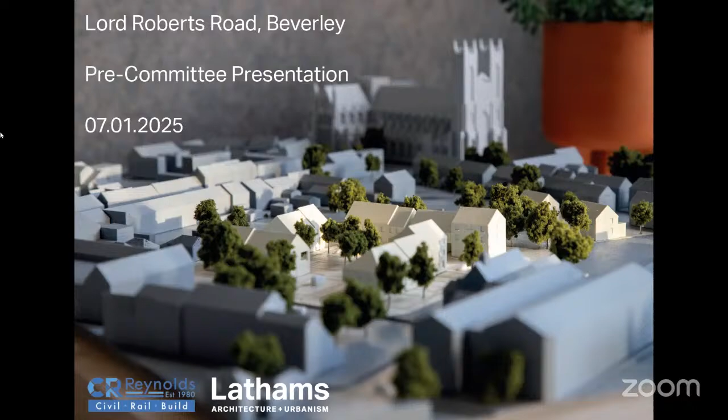Committee, afternoon. I'm Doug Jennings, the planning agent for the scheme, and with me is a local developer, Stephen Reynolds, who spoke to you at the committee meeting last month, and John Phipps, the architect, and Simon Chu alongside me from the Architectural Practice and Heritage Consultancy as well.

Now, at the committee meeting last time, you were concerned that you didn't have clear enough details before you, because of the small-scale black and white nature of the officer report. So we're pleased to show you this afternoon the scheme in an enhanced graphic display, and Simon's going to run through some slides later on.

It's a difficult site to develop with competing opportunities and constraints, and these sometimes pull in different directions, and you'll hear more about these from others. Key matters for consideration are obviously the context, views of the Minster, and the character of the conservation area.

Others are technical matters, such as the Highway Authority's requirement for 2 parking spaces per dwelling, and of course the modern building regulations. Some are council sales contract and local planning policy requirements, such as the need to retain the 50 parking spaces. And some are the need to provide for the operational requirements of the theatre and the rifle club. I can assure you that a great deal of thought and analysis has been given to all these matters, as you'll hear, and to all consultee comments, taking them into account and resulting in many iterations in the scheme.

It has been a very collaborative process with all the relevant officers of the council, as well as with Historic England and other statutory consultees. This is not an easy site to develop, and balances are inevitable. But I believe what you have before you is a very good scheme that is planning policy compliant, and that is why we have an officer recommendation for approval.

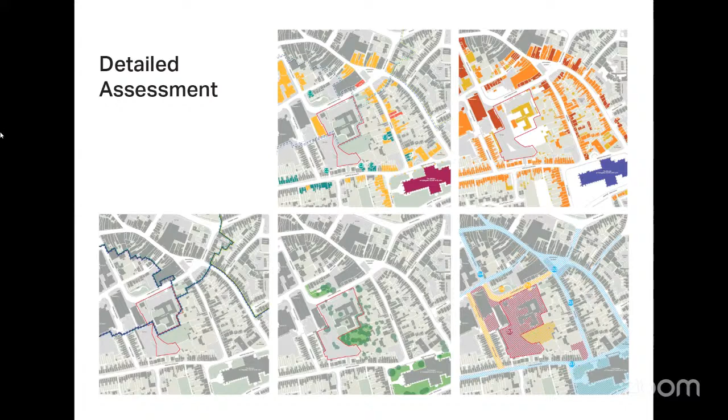In terms of the retention of number 8, there was considerable thought put into that. We looked at one of at least half a dozen schemes, and must have produced 30 different options to get to one which is deliverable and of limited impact.

Number 8 was considered for retention, but the current scheme, which sees its loss, is supported by Historic England. They can see the heritage benefits of the scheme, which outweigh, in their view as National Heritage Advisors, the heritage harm from the loss of number 8, which has no designation.

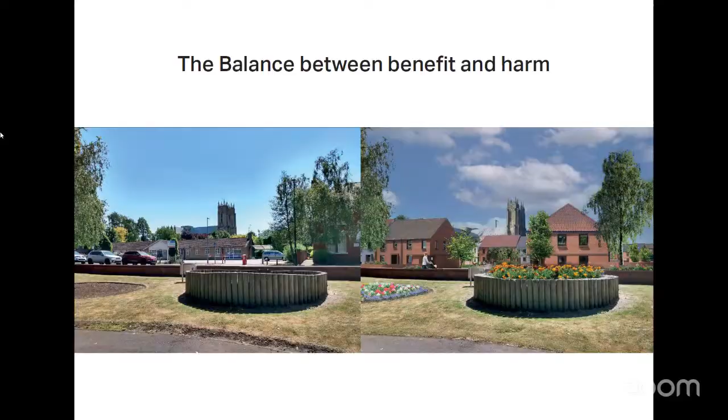What we attempted to do here was reconnect the site, which is essentially introspective and isolated at the moment, back in as an active and vibrant part of the town centre. What we're not trying to do with our proposals is mimic the neighbours. Understanding of character, which your own design guidance and design codes would suggest, will lead to something very much of its time, but informed by context rather than copying it.

Simon will talk about issues of sustainability, which have been raised by previous speakers, so I can probably leave it at that. But the overall summary, if I could quote Historic England, is that they would recommend the scheme be approved.

I'm just going to take you through, for the rest of the time - about 20 minutes, I think - a bit more detail of the scheme so that we can understand it better.

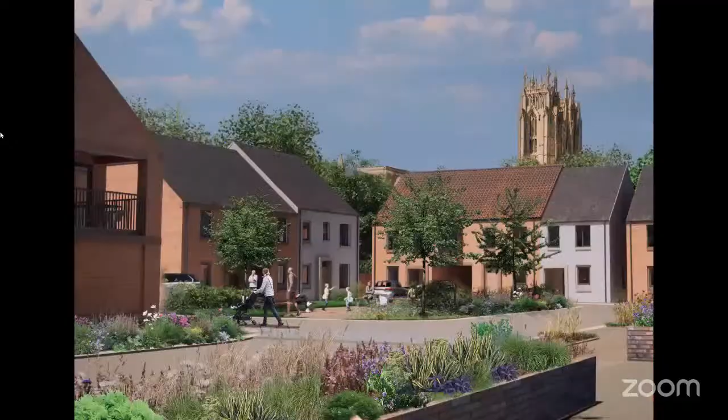What we've got here is a very complex site. I'm going to try and get through as much as I can, but we've got a very connected and constrained site in the middle of a very busy town centre.

The rest of the site is similarly unmaintained and overgrown, with parts not accessible. The parts that are accessible benefit the car park, which we're retaining as much as possible, but there are blank gables, not active frontages, although there are some views inside the car park of the Minster.

Overall, I hope we can all agree that there is a negative impact, and as people have already asserted today, that something does need to be done on the site.

From the outset, as John said, we've got a clear methodology of how we assess and consider our designs, and that always comes from context-led analysis, including the views of the Minster throughout the site, or along Lord Roberts Road, the public zone to the north where we can see the Minster from.

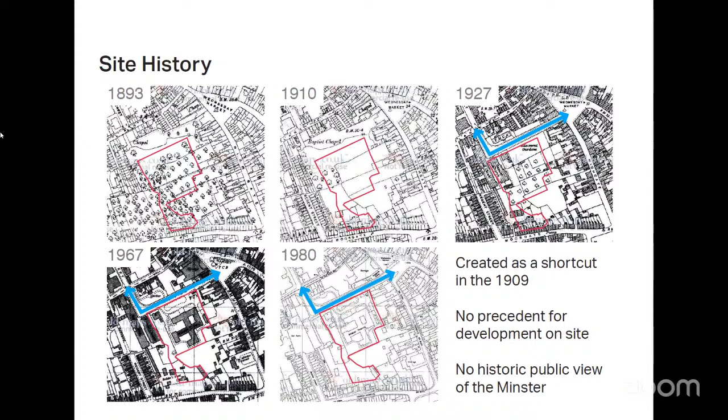It was part of a woodland or orchard, likely associated with the Minster. It was only in the 1920s that the Baptist church, the listed theatre, was introduced alongside number 8. The character area zones defined within the conservation area appraisal, the site actually sits within two of them. Importantly, the Guildhall area's special interest is that the architecture is grander and less typical of East Riding vernacular, using more expensive materials and more stone dressings.

So what we're trying to demonstrate is that there are contrasting and quite complex design decisions to make based on very differing zones, and we've taken that into account, considering its place within the wider Beverley, but also within these two different character zones, which are quite different. One is the Minster zone, and the housing there is dominated by Highgate and Minster Moorgate in particular, which we'll go into in more detail.

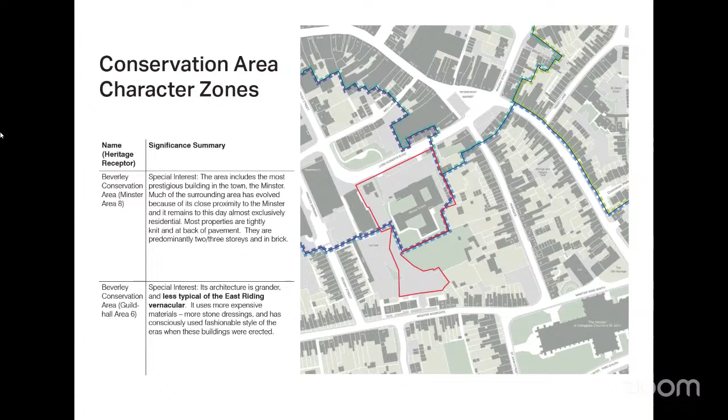As John alluded to, the research and analysis extended past the site into considering the quality of spaces, routes and connections. With regard to the conservation area, Lord Roberts Road is actually quite poor, considering the hard landscaping and parking that dominates that area. It's also very busy. The access to the theatre could be considered slightly unsafe, being right on the corner there, so that was something we were conscious of trying to improve.

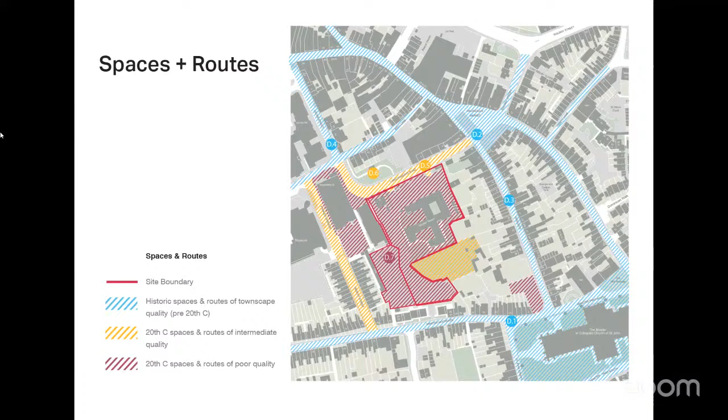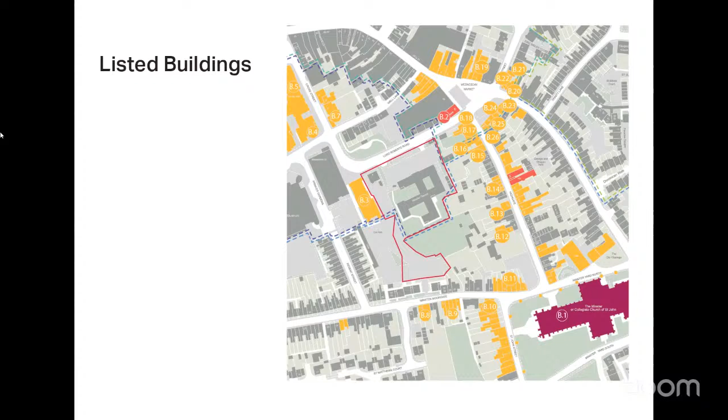Awareness of where all the listed buildings are as well, and alongside that we considered the views and how that would impact on certain listed buildings. Our heritage assessment considers the impacted views, which were considered alongside the conservation officer and agreed. We looked at lots of different views, I'll come back to that.

As mentioned, we did consider wider impacts from the main spots. This is all within the submitted application that you can view, along with the limited actual extent of development impact, which we'll come back to. You can see there are glimpse views of the site, but because you're only travelling down Lord Roberts Road, you don't actually get to see much of the site past the care home.

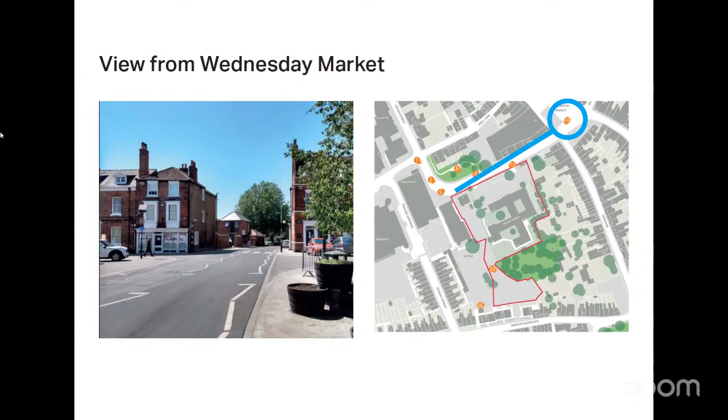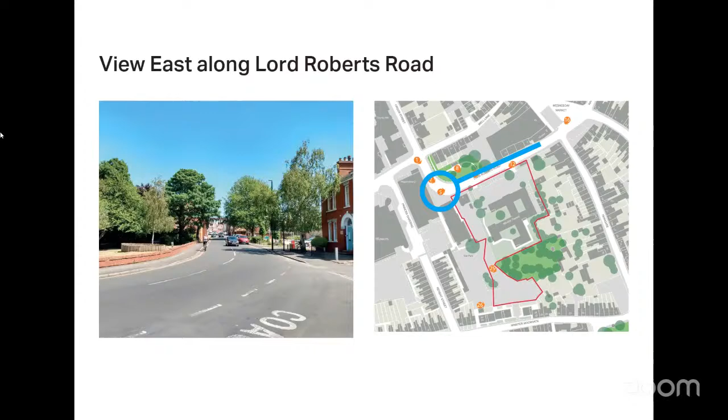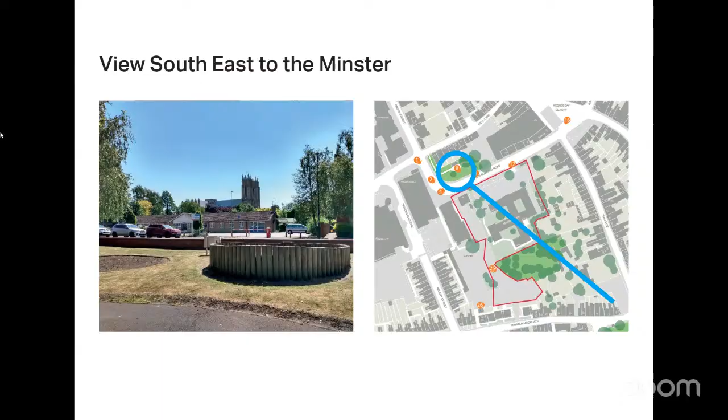What you can see is dominated by parking and poor quality condition, as described, and similarly it opens up toward the west with the garden opposite. We're very conscious of this view and the panoramic afforded to the Minster, but considering this in more detail, we think part of this is of high value where you see the roofscape of the Minster alongside the roofline of the surrounding housing, but there's a significant amount of the existing site which significantly detracts from the conservation area and the listed buildings.

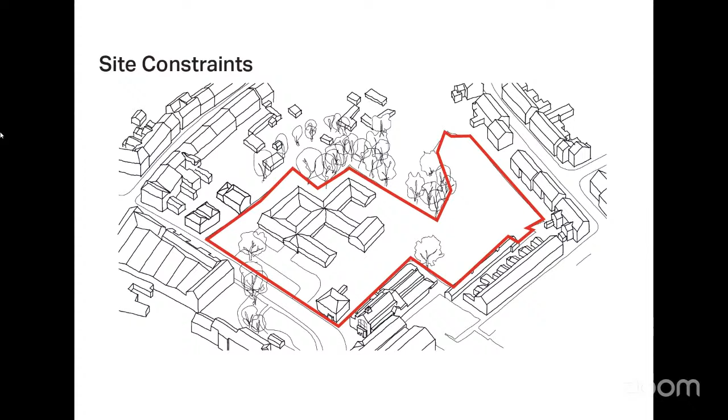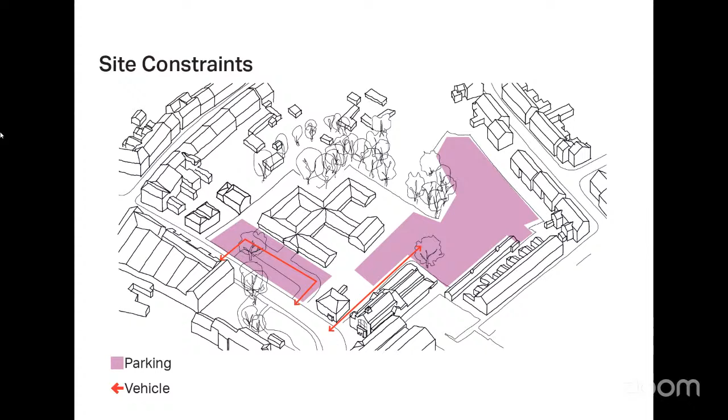So briefly to discuss the site constraints, we've probably talked about most of them already, but this is just to take you through our narrative. The site is a very odd shaped site, so it's very difficult to develop as a result. We've got parking that dominates the site, much of it being retained next to the Theatre and Rifle Club, as mentioned. The accesses onto Lord Roberts Road are multiple as well, especially the one next to the theatre, which isn't great because you haven't got a lot of visibility with number 8 blocking that. Much of the site is vacant and inaccessible.

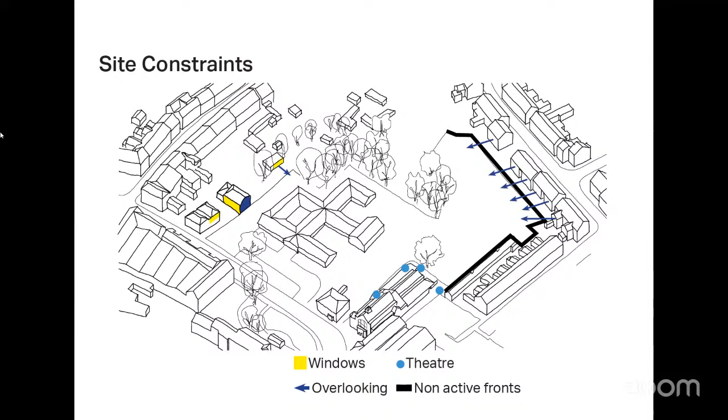We've got overlooking blank gables, access points, and overlooking windows to consider throughout the site. Not only is the shape awkward, we've had to deal with a lot of site constraints, including a lot of vegetation. We've never been able to properly survey the trees at the back of the site, but they're outside the boundary anyway. There are two main trees we're looking to retain: one to the rear of the theatre, and the plane tree along Lord Roberts Road.

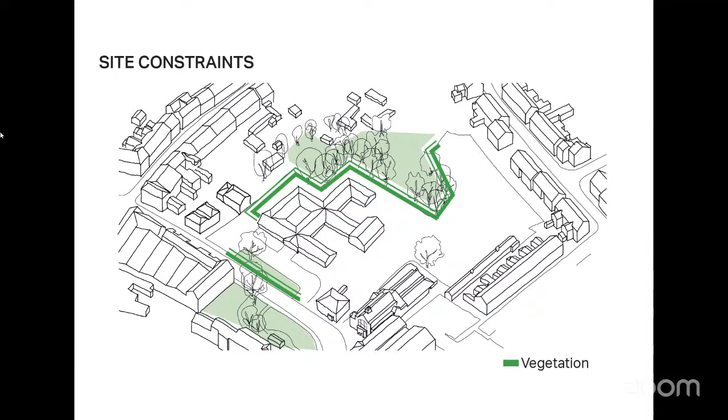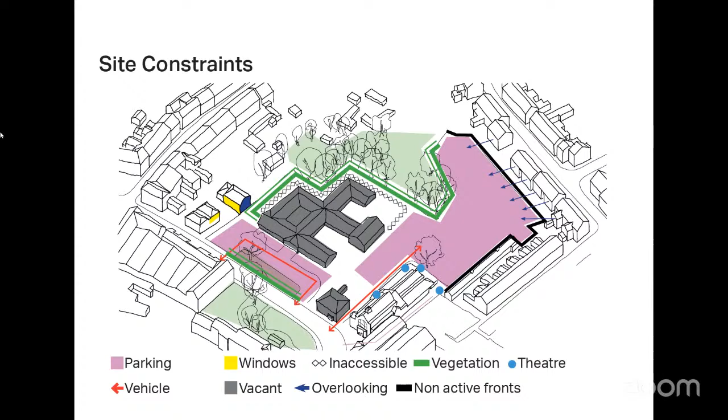Overall, it's a really hard site to develop. We've been constrained from the start, and considering the analysis we've done, that is how we take our design forward with a solid base of understanding, which was accepted by the conservation officer.

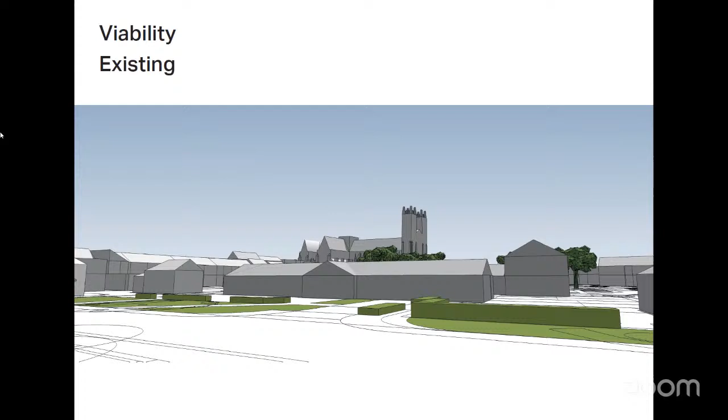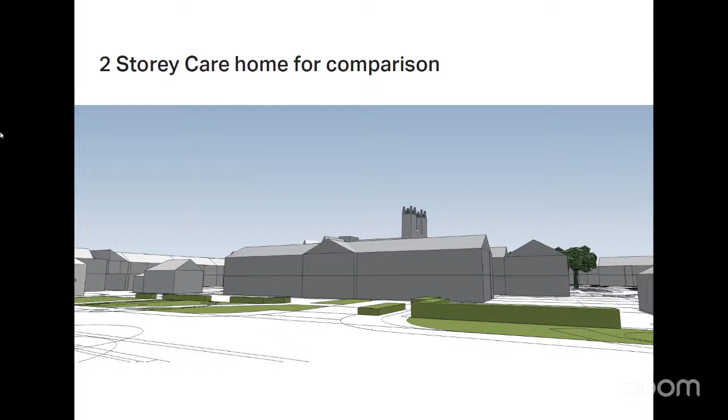Taking two-story development as something more akin to Beverley's historic character footprint, just to consider where you might put development on the site. This is not what we've done necessarily, but it reflects the complexities of the design process. If we were to put housing at the back of the footpath, like much of Beverley and the surrounding streetscape, you completely obliterate the view of the Minster.

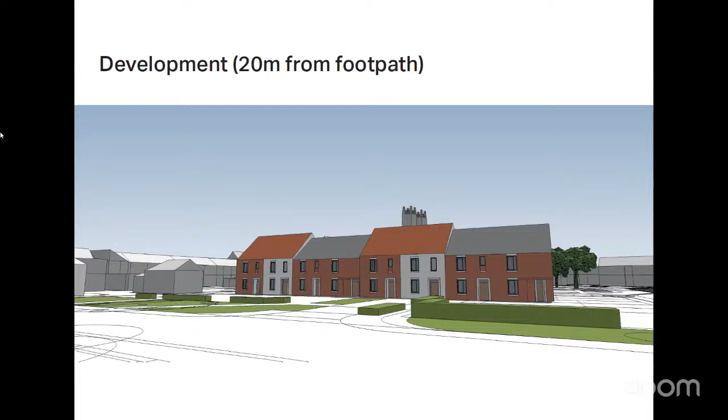So as a design challenge, if we start setting back by 10 metres, 20 metres, and you can see where I'm going, 40 metres, and at the end 55 metres, you get back to where you might get to with the one-story development versus an even more setback two stories, which doesn't impact on the view whatsoever.

The green area highlighted, therefore, if we take that approach, means that space is undevelopable, or would become open or hard landscape that's unmaintainable for the council, a developer, or residents who would live on the site. But obviously it takes out a significant chunk of developable area.

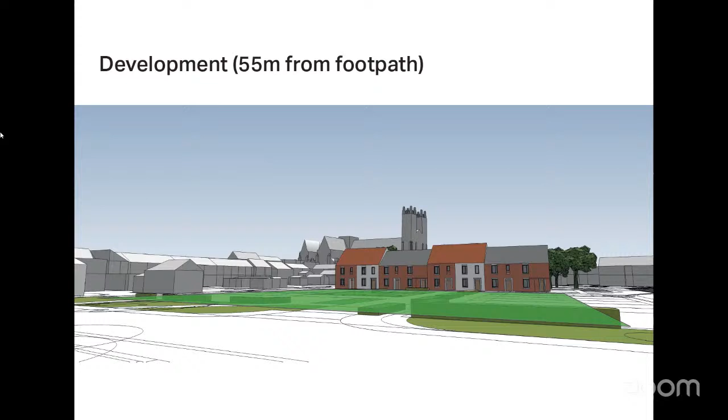Therefore, our scheme has been considered in that respect, that there has to be a striking balance between the benefit of improving the site from its current poor condition, and affording and maintaining the view of the Minster, specifically from Lord Roberts Road Garden. We've done that by opening that up from Lord Roberts.

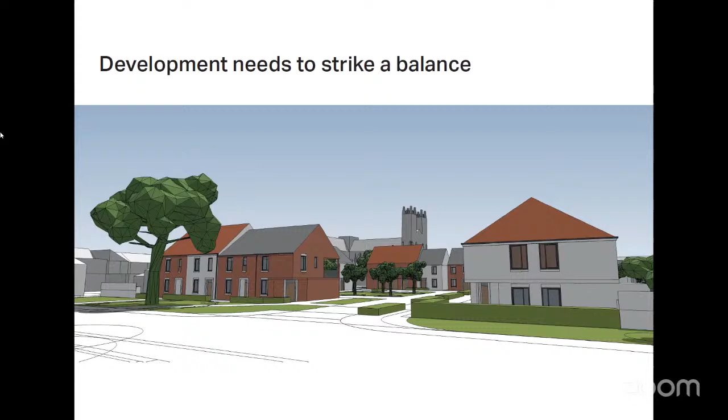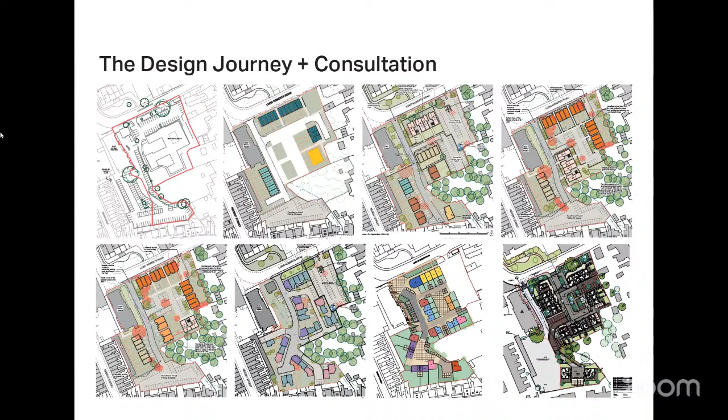As discussed, there's been significant discussion and iteration throughout the design process. This is a view before and after, effectively, from the shelter in the gardens opposite, to the north.

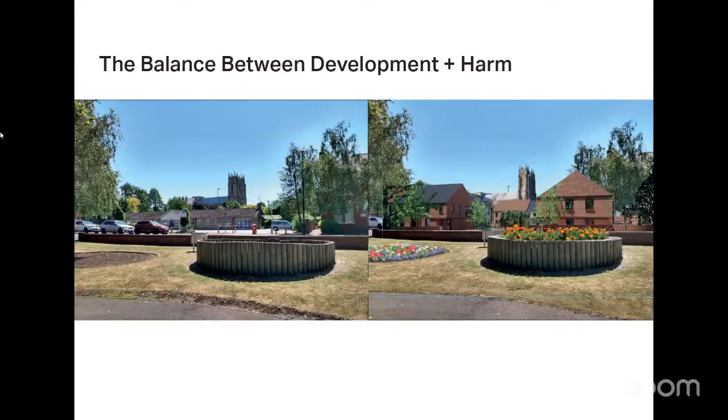The design principles that John discussed earlier are very simple, actually. The car park is to be retained, and an improved access is being put in to Lord Roberts next to the theatre. Access for development must come from Lord Roberts Road, as the rest of the site is not accessible.

We did try to look at connecting to Minster Moorgate to the south, but this was not achievable due to private land issues, although there are gaps between some of the houses. We did try to look for that because we wanted to increase connectivity, but it wasn't available to us.

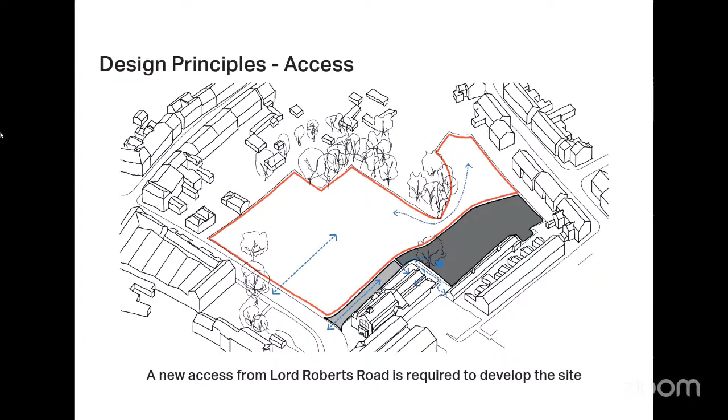The views of the Minster were considered with Historic England and the Conservation Officer in terms of selecting specific views to maintain. The one from Cross Street is actually an improved view, we think, and I'll illustrate that later. This also included increasing visibility of the listed church.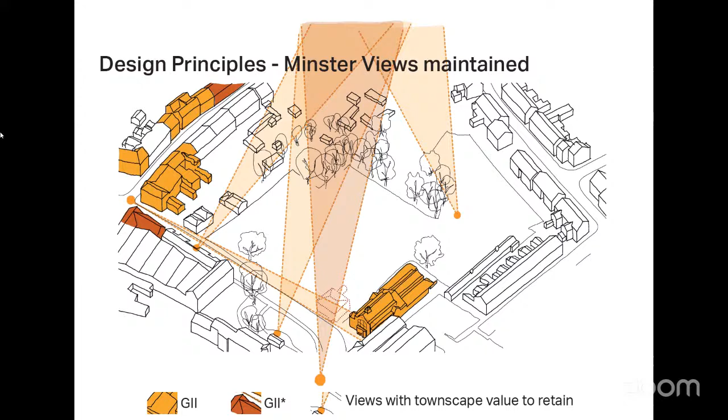This did result in the loss of number 8, which was regrettable, but based on this diagram, this is why. Part of the comments we had was about retaining the plane tree at the front, which is of ecological value, and actually enhancing the connection between our site and the Lord Roberts Road Garden.

So as to enhance that green strip and re-emphasize the character of the already established road, it isolated number 8 from the rest of the development, and there wasn't a way we could connect it into a more cohesive development, because it's at the back of the footpath, when we've already illustrated why we couldn't have back-of-footpath development. That, alongside the benefits of the improved, or limited-impact, view of the Minster from Cross Street, is why it was removed, with the added benefit of better visible access to the car park.

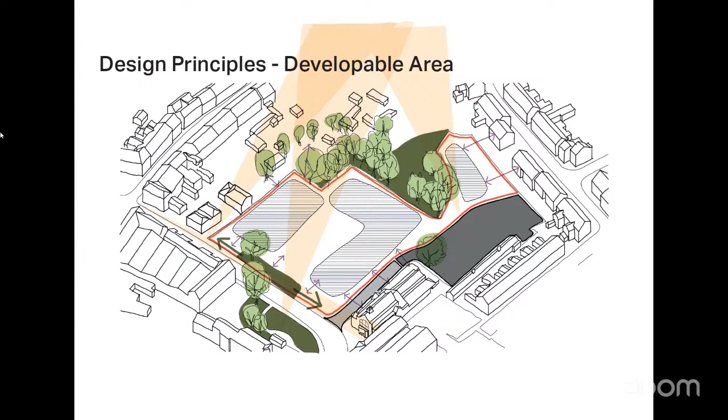This creates a courtyard, an enclosed and overlooked space. The two properties to the south are there to bookend development. We didn't want a wasted bit of space which would be unmanageable and not very safe from a security point of view. We felt that defining the boundary between the secret garden and a house in private ownership would be of significant benefit and help utilize that space, which is actually quite dead at the moment, being just a car park.

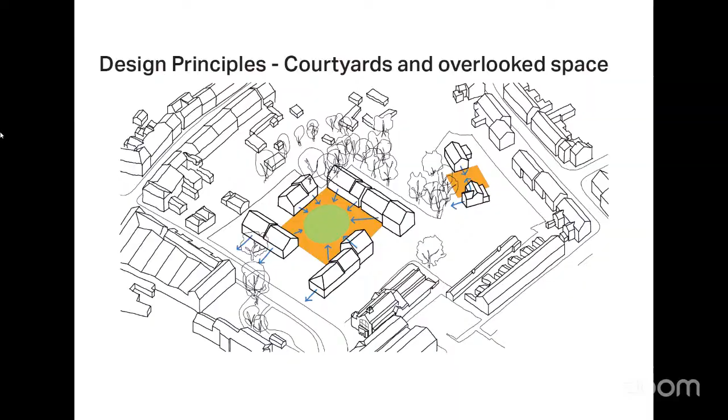So within that, this is all about the site layout. I'll get into the detail in a second. How long have I got? 7 minutes. So we're talking about good natural surveillance.

It's enclosed. We'll go into detail about the hard landscaping and soft landscaping. It connects into the site and is very legible in terms of understanding how you maneuver through it. This is quite important in terms of reconnecting that site into Beverley.

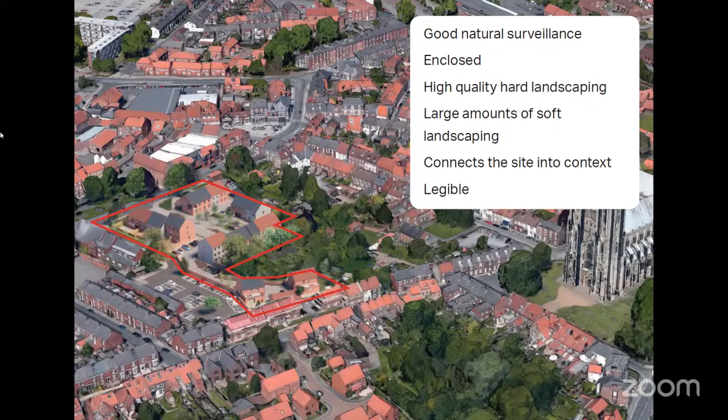So just to touch upon character assessment of the area and picking up details and materials that were looked at, we've done this significantly within the existing context. We've looked at lots of different scenarios and what Beverley is akin to.

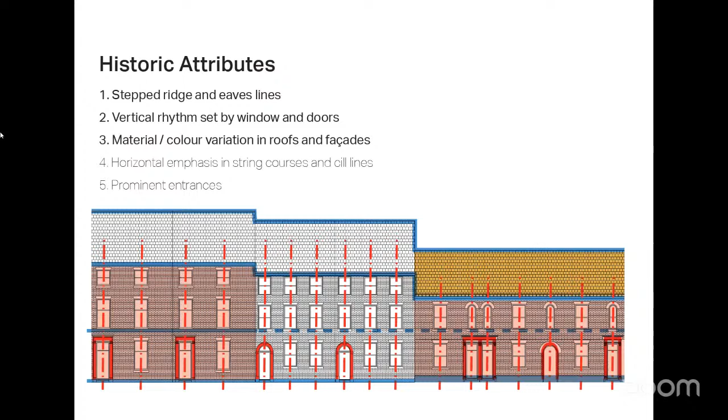5 minutes remaining. Okay, 5 minutes. And then we've picked out 5 different attributes that we've tried to take forward in the design. One is the stepped ridgeline and eaves. Vertical rhythm set by windows and doors. Material colour and variation in roofs and facades in terms of slate, pan tiles, painted brick and facing bricks.

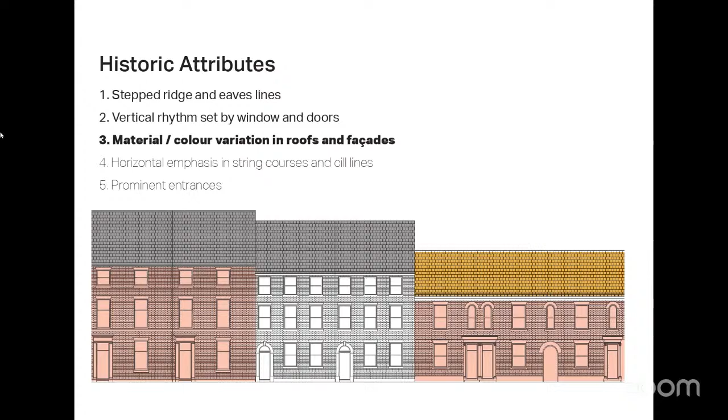Horizontal emphasis with sills and string courses and prominent entrances, all of which we have tried to incorporate within and be informed by the local character within our scheme.

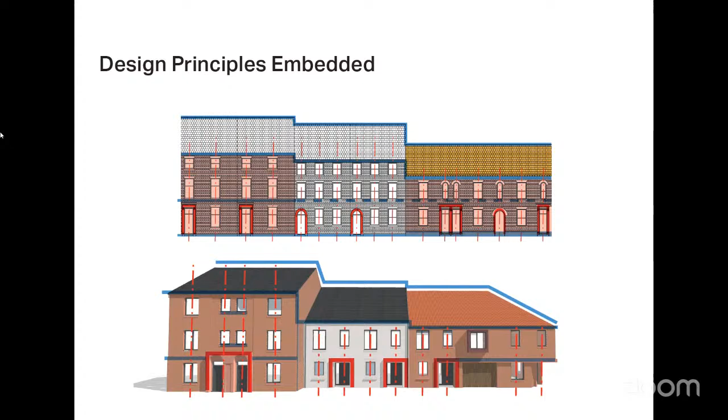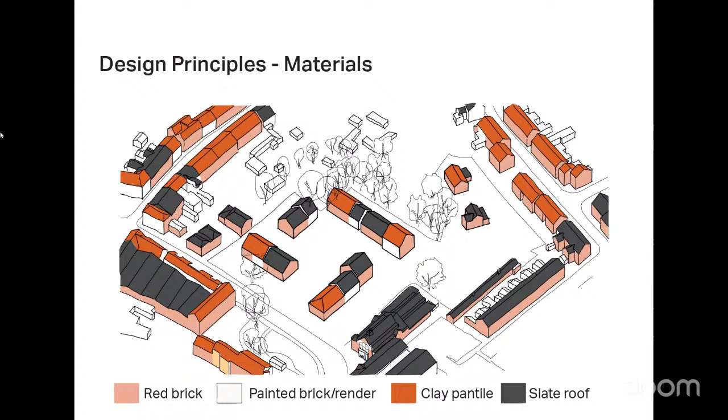Material distribution in the roofs and facades have been carefully considered with a variation of red brick and painted brick, similarly with clay pantiles and slate roof.

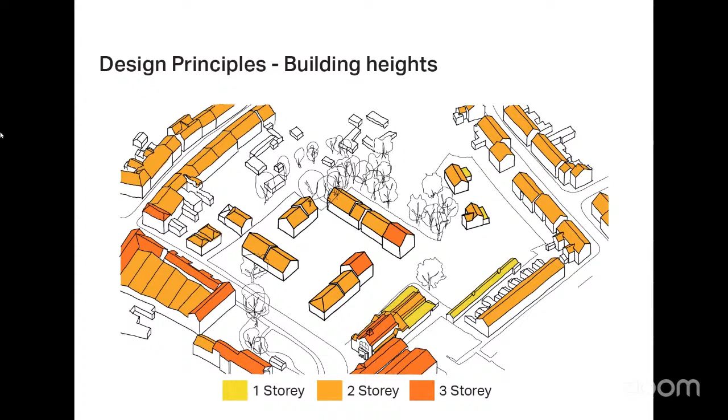Building heights have also been thought about. There are 2 portions of 3-storey elements, but they do not affect the views of the Minster from those viewpoints already associated. The roof lines are intentionally stepped to remove a blank facade and create visual interest in the roof line, as you can see from this image.

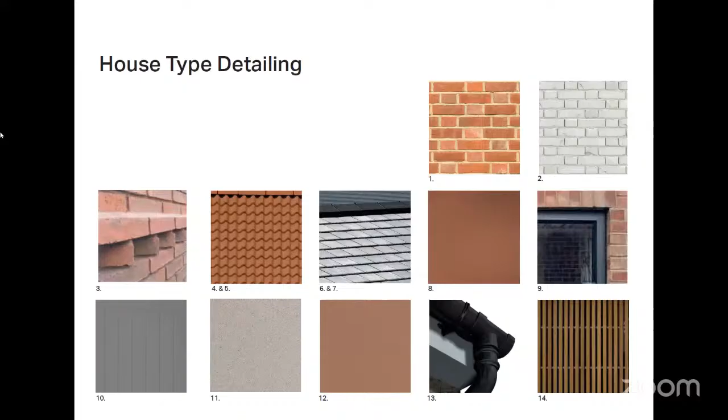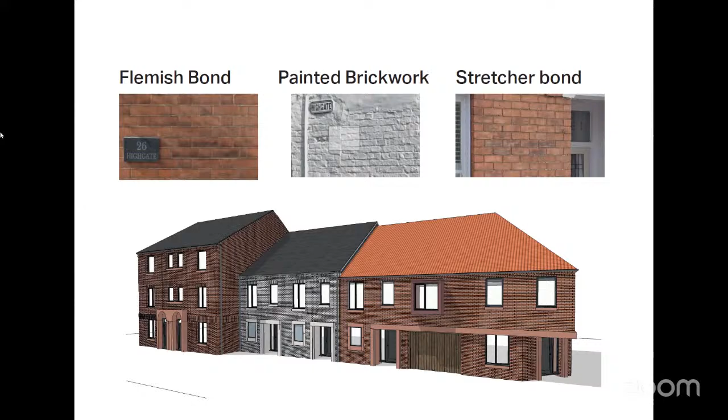The house detailing has incorporated various elements already discussed in terms of slate and pan tile roofs. We have a blend of Flemish bond and stretcher bond and painted brickwork, all of which can be seen within the local vernacular and streetscape.

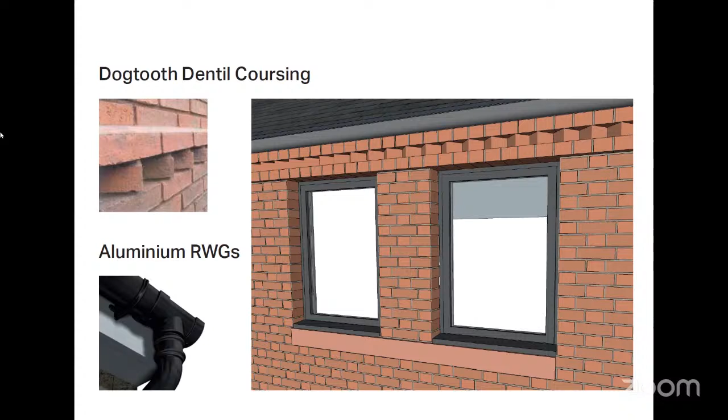We've got dentil coursing to the eaves to increase the detailing. We've got high quality aluminium windows and rainwater goods. We've got prominent entrances made from cast stone to reflect a similar idea, but in a more modern way.

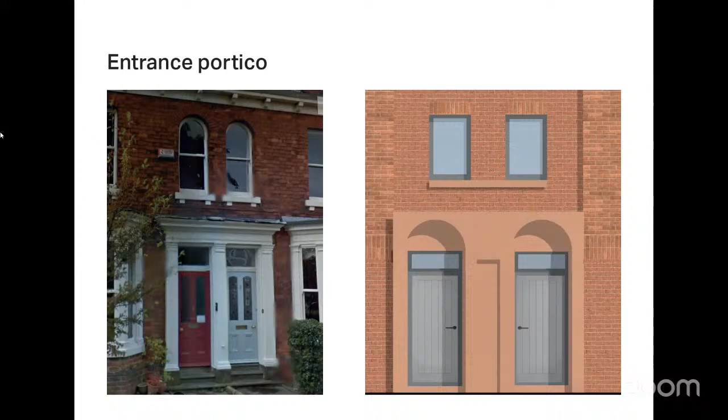We're not trying to replicate what's there, but we are trying to emphasize the entrances that are aligned with the windows above and Flemish bond brickwork in prominent zones. Soldier coursing, stone sills, all of which have been incorporated.

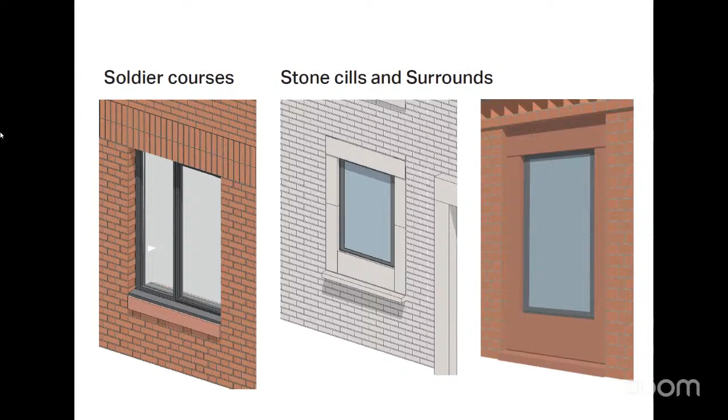The surrounding sills you can see on the right hand side are there to facilitate and maintain taller openings, but where there's bathrooms or kitchens, you need a higher sill. Therefore, that's been considered, and you can see how the vertical rhythm and horizontal rhythm has been established.

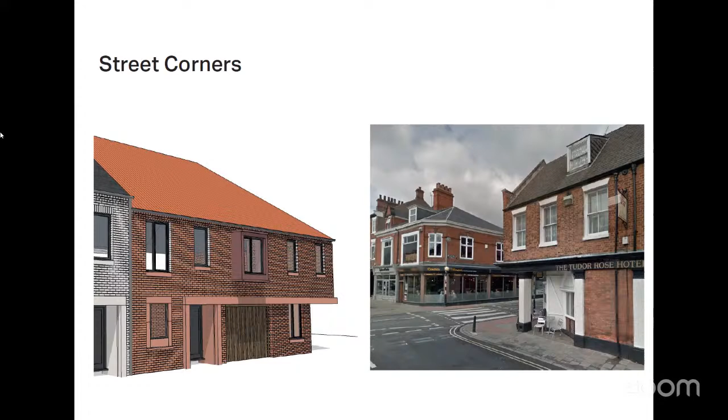We've also got chamfered entrances to Lord Roberts Road as you enter the site, as influenced by Wednesday Market.

External landscaping, we have reduced the amount of car parking, which we tried to do, and that was agreed with Highways. The quality of materials was important, so we've used non-adopted roads to improve and allow more variety of hard landscaping.

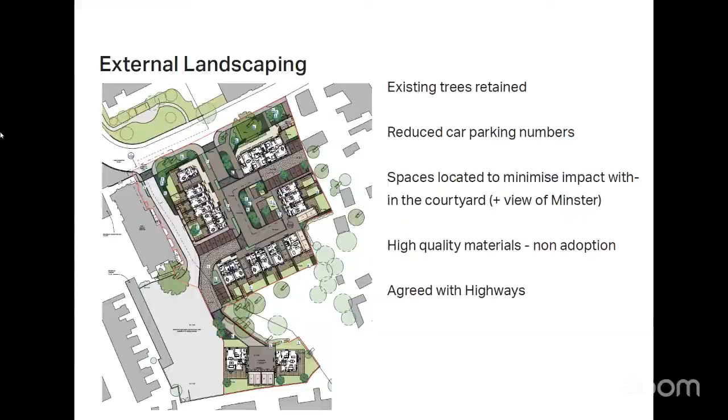Boundary treatments have been considered with many of the boundaries being brick wall to existing external facing elements. The detail is here in the application.

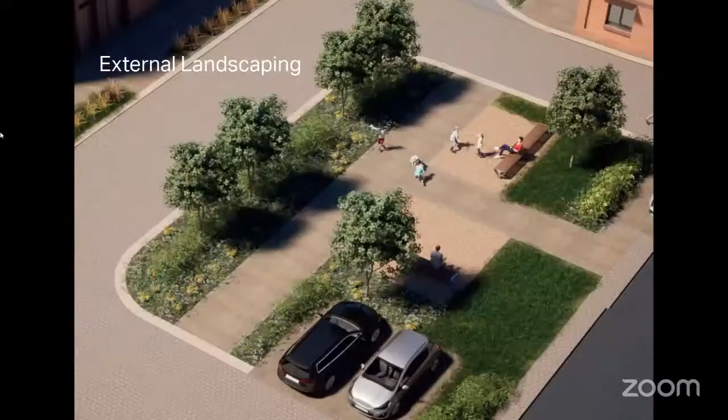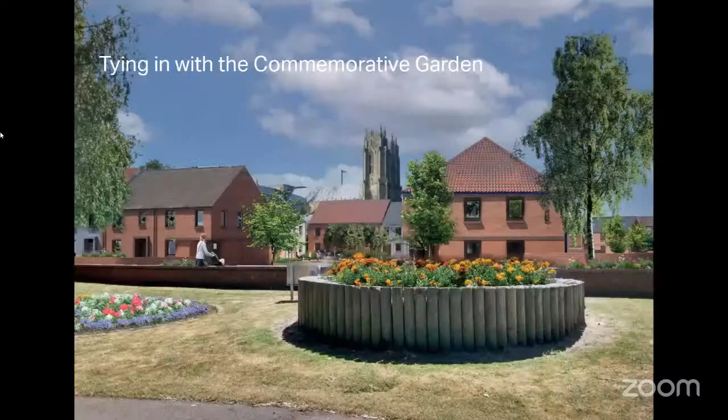This is the designed urban square within the development, where we've tried to minimise the amount of parking that you can see from Lord Roberts Road. So the parking has been designed in a way to try to limit that when considering the view of the Minster, and that connects through to the commemorative gardens across the way.

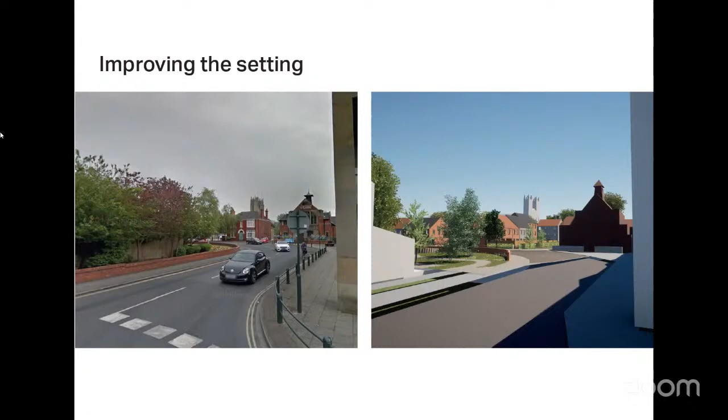So all in all, this project deals with significant constraints on the site, and we have considered views and impacts in our heritage assessment, including the cross street view, which you can see isn't impacted on the Minster view. And I'll just pass on to Doug for a closing statement.

Well, I just hope you appreciate the depth of analysis that has been undertaken over the last 4 years. We've shared the evolution of the scheme, which has changed because of comments received, particularly from the theatre, in terms of where you put the parking, where you put the housing. Through the 4-year process, we've ignored nothing or no one, including, or should I say, especially the civic society's comments. And I hope that what you see on the screen there now reflects what we've tried to achieve, which is a quality scheme.

And that's your 30 minutes. Thank you very much. Well, there we are, a quality scheme in the middle of Beverley. Thank you very much. Thank you, gentlemen.